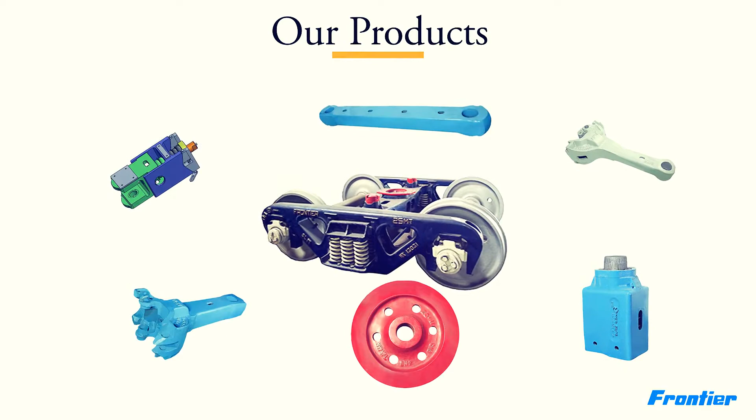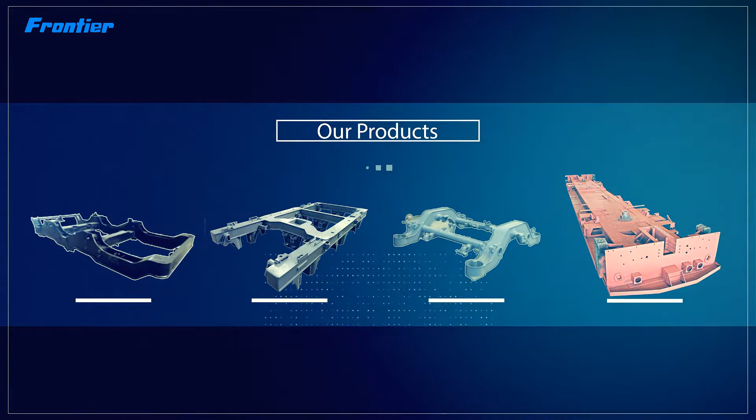Some of the major products manufactured by our company are friction clutch, balanced draft gears, E-type and H-type couplers, slackless drawbars for BLC wagons, cast steel bogies for 22.9 ton and 25 ton axle load, fabricated bogies, front parts for LHB bogies, underframes for LHB bogies, and locomotives.

Indian Railways and their associates are the major customers of Frontier Alloy Steels.

In order to globalize our prospects, we have entered into a technical collaboration with MCT USA, Trinity Group, and Miner Inc. USA, and are actively associated with IIT Kanpur and RDSO for developments.

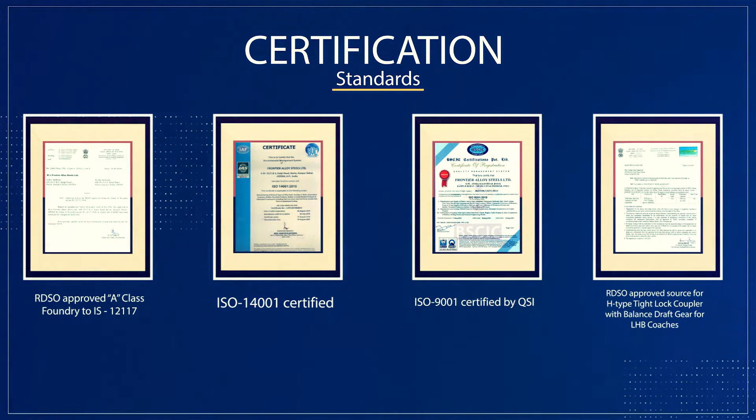Accredited with Class A foundry status from RDSO Lucknow, ISO 14001, ISO 9001, and RDSO-approved source for H-type tight lock couplers for locomotives with low preload, balanced draft gears for LHB coaches, and fabricated components, namely electric and diesel locomotive bogies. RDSO Part 1 source for H-type tight lock couplers with low preload draft gear for diesel and electric locomotives.

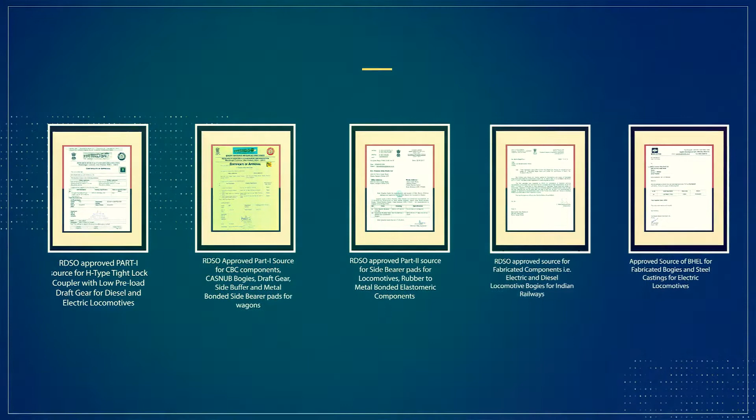CBC components for Casnub bogies, draft gear, side buffer and metal bonded side bearer pads for wagons. Part 2 approved source for side bearer pads for locomotives and rubber-to-metal bonded elastomeric components.

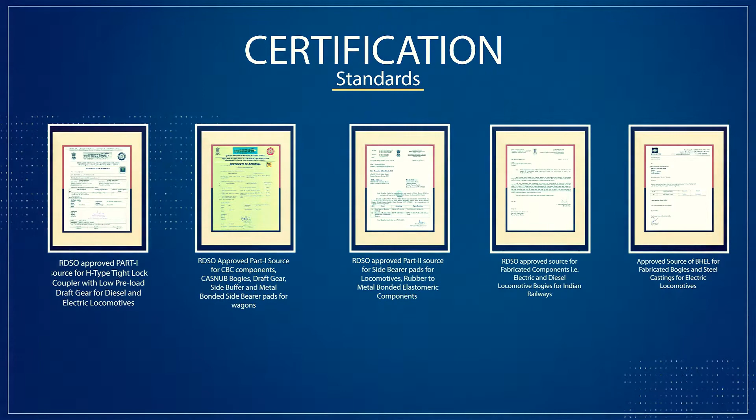Approved source for BHEL for fabricated bogies and steel castings for electric locomotives.

Manufacturing facilities.

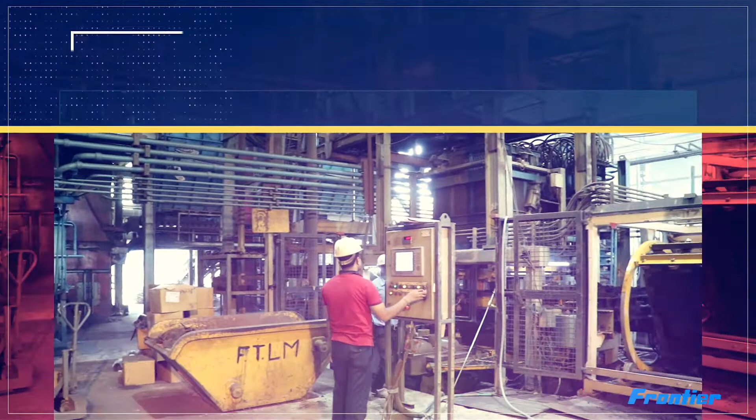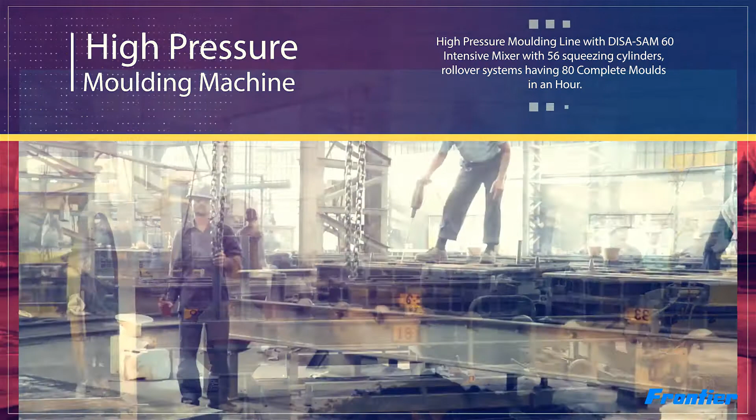Frontier Alloy Steels Limited is equipped with the latest high-pressure molding line with DISA-SAM 60 intensive mixer with 56 squeezing cylinders, rollover systems having 80 complete molds in an hour.

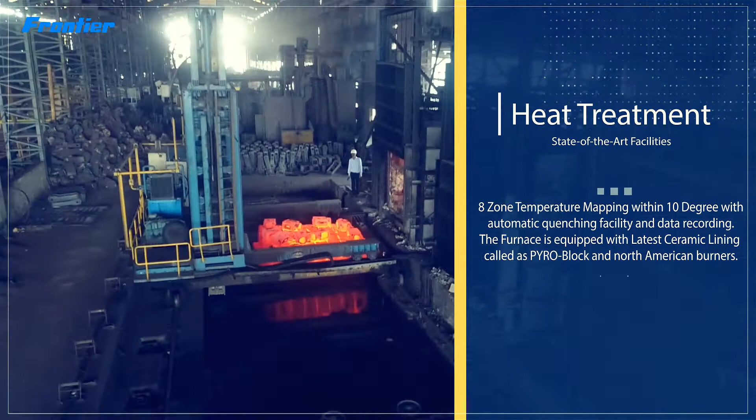State-of-the-art heat treatment facilities with 8-zone temperature mapping within 10 degrees, with automatic quenching facility and data recording. The furnace is equipped with the latest ceramic lining called Pyro Block and North American burners.

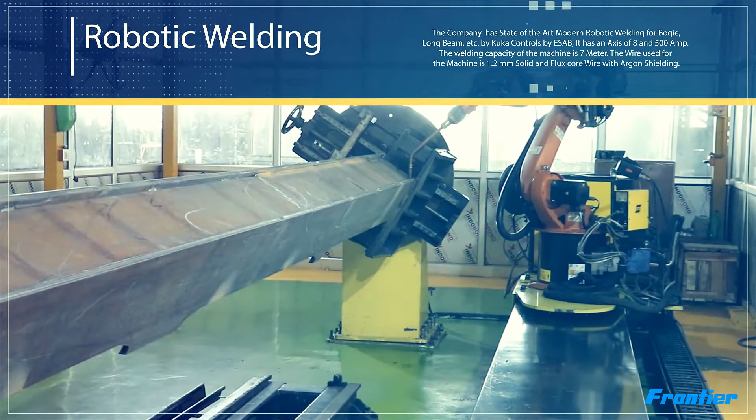The company has state-of-the-art modern robotic welding for bogies, long beams, etc., with KUKA controls by ESAB. It has an axis of 8 and 500 amp. The welding capacity of the machine is 7 meters. The wire used for the machine is 1.2mm solid and flux core wire with argon shielding.

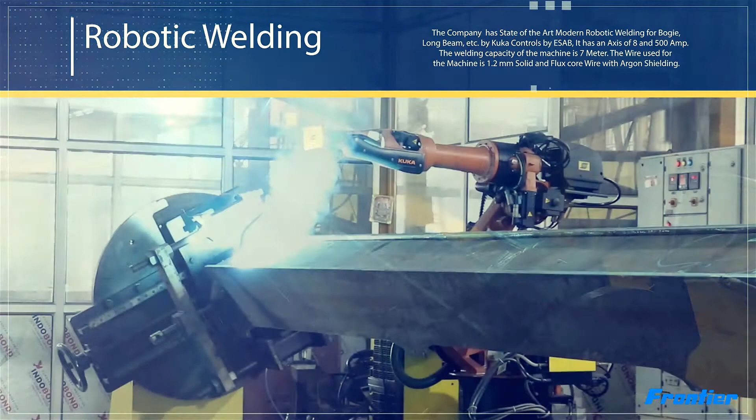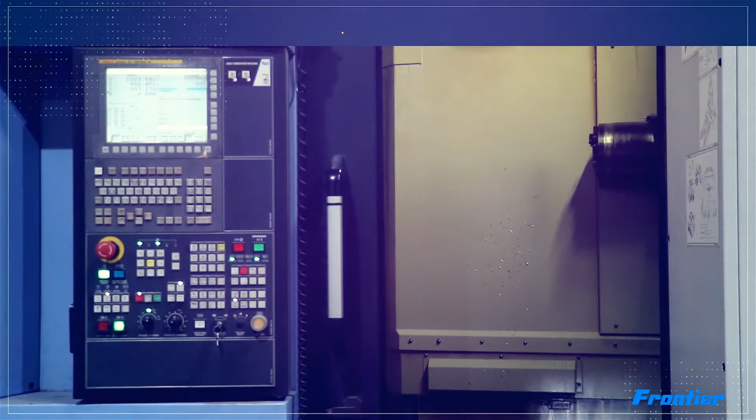Horizontal machining center having bed size 800 by 800 millimeters with BT50 spindle having torque 105 to 147 Newton meters, with 50 tool ATC, dual pallet changer, through coolant cooling.

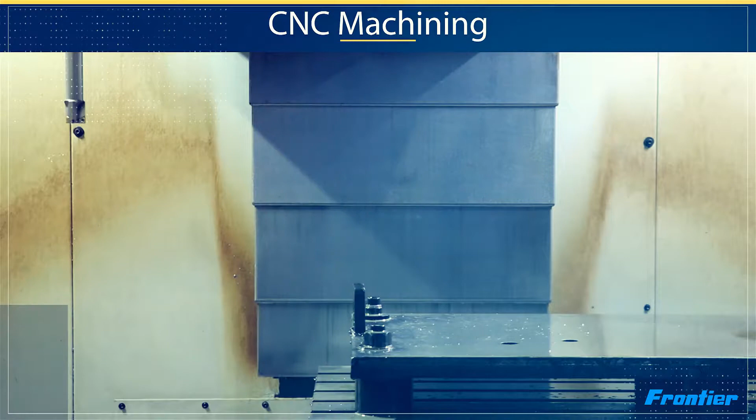Vertical machining center having bed size 1250 by 600 millimeters with BT50 spindle having torque 188 to 254 Newton meters, with 28 tool ATC, through coolant cooling.

Tap hammer facility for dynamic testing. We have in-house tap hammer testing facility with 27,000 pound drop weight and instrumentation as per AAR M901F, capable of generating dynamic events within a frequency of 1000 cycles per second.

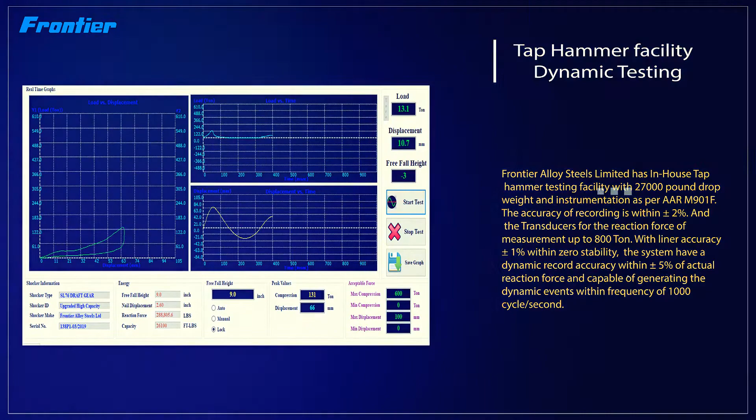In-house MAGMA casting simulation software is a comprehensive and effective optimization tool for improving metal casting quality and reducing production cost. The software is fully featured to simulate the pouring, solidification, defect analysis, sectioning, and pouring temperature of different cast materials.

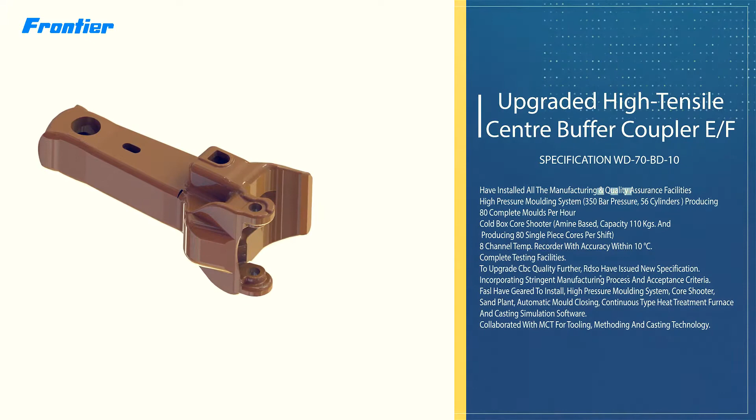H-type tight lock coupler for coaches, originally APTA make couplers, indigenously developed with our principal collaborator MCT USA, used in locomotives and LHB coaches with advanced tooth and socket joints with maximum slack of 3.5mm for comfortable ride.

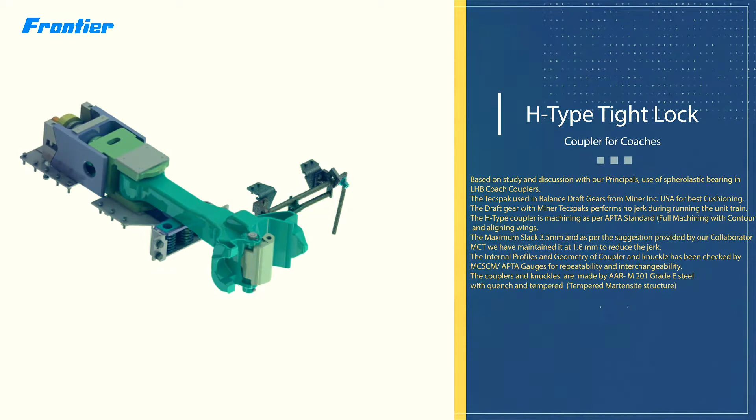Balanced draft gear assembly for H-type tight lock coupler, developed indigenously with our principal collaborator Miner Enterprises USA with thermoelastic compression springs. Draft gear for BOXNHL wagons SL76, developed in collaboration with Miner USA and as per RDSO specification with 45,000 foot-pound dynamic capacity.

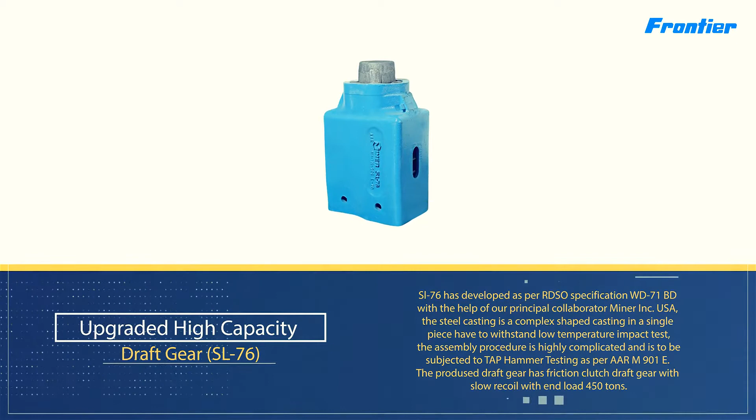Draft gear for BOXNHL wagons SL76, developed in collaboration with Miner USA and as per RDSO specification with 45,000 foot-pound dynamic capacity.

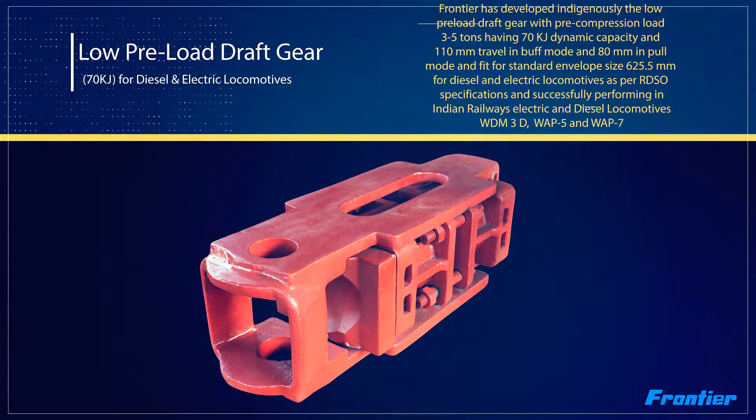Low preload draft gear, 70 kilojoules, for diesel and electric locomotives, developed indigenously with pre-compression load of 3 to 5 tons, having 70 kilojoule dynamic capacity and 110mm travel in buff mode and 80mm in pull mode, fit for standard envelope size 625.5mm for diesel and electric locomotives.

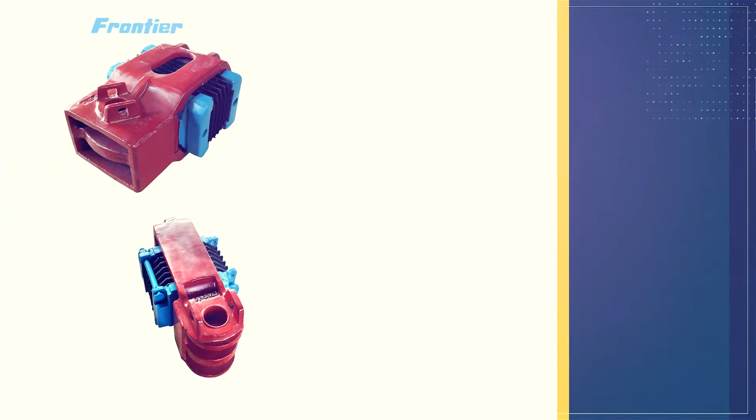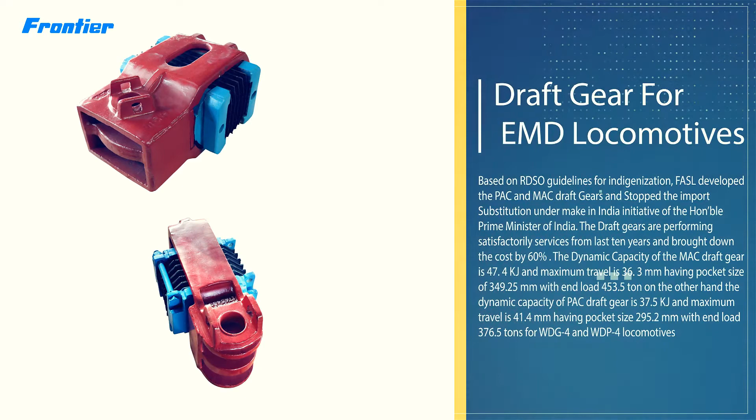Draft gear assembly for EMD locomotives, developed indigenously based on RDSO's guidelines, providing import substitution under the Make in India initiative. The draft gears have been performing satisfactory service for the last 10 years and brought down the cost by 60%.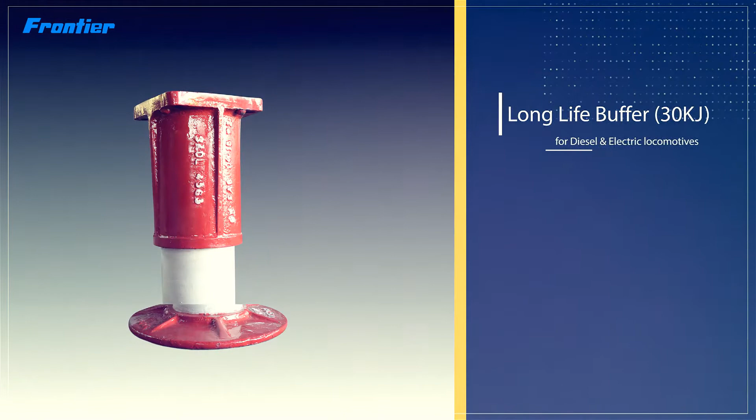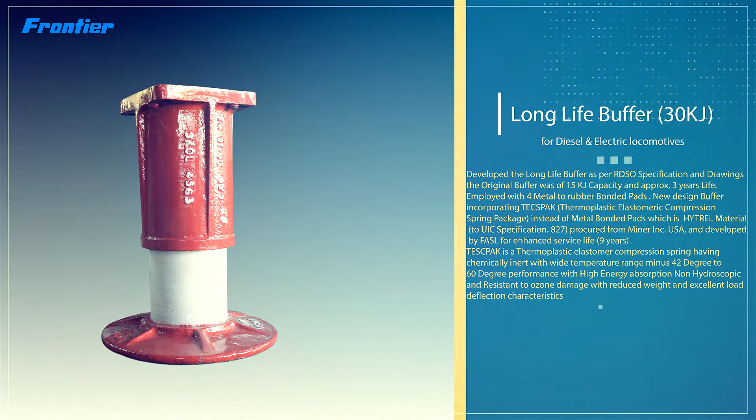Long life buffer, 30 kilojoules, for diesel and electric locomotives, developed as per RDSO specification and drawings, incorporating TECSPAK thermoplastic elastomeric compression spring package instead of metal bonded pads, which is a HYTREL material, to UIC specification 827, procured from Miner Inc. USA and developed by FASL for enhanced service life of 9 years.

Slackless drawbar for BLC wagons, developed indigenously as per RDSO specification under the guidance of our principal collaborator MCT USA in the year 2010, withstanding static loads of 900,000 pounds without rupture, providing import substitution under the Make in India initiative.

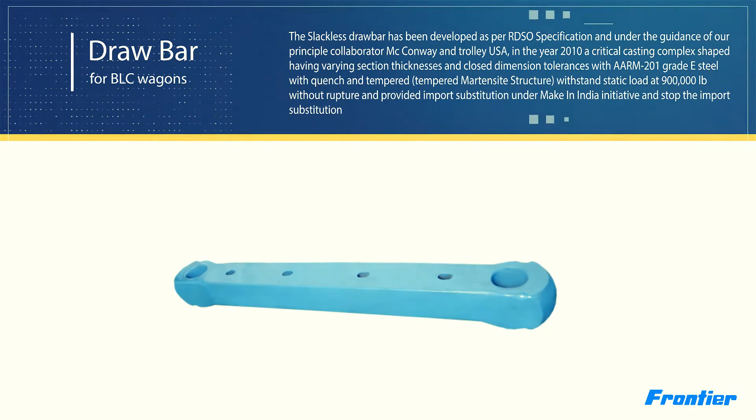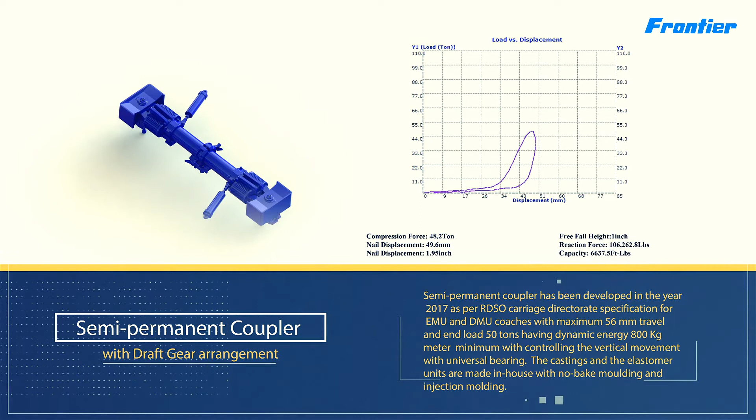Semi-permanent coupler with draft gear arrangement, developed in 2017 as per RDSO Carriage Directorate specification for EMU and DMU coaches, with maximum 56mm travel and end load of 50 tons, having dynamic energy of 800 kg/meter minimum.

Lost wax setup having capacity of 120 tons per month in Paonta unit for WD70 BD coupler components and H-type coupler components.

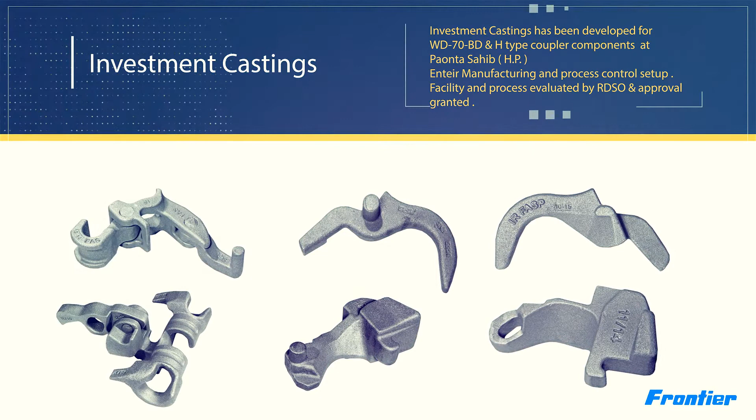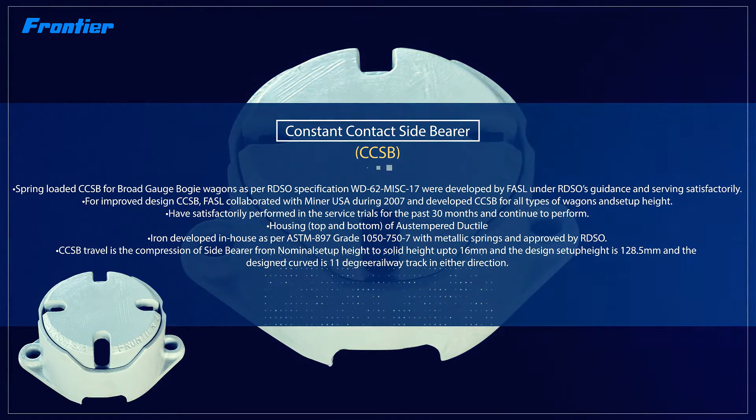ADI casting facilities at Kanpur unit having capacity of 150 to 200 tons per month, manufacturing spring-loaded CCSB as per RDSO specification WD62 with austempered ductile iron, and friction wedge with higher coefficient of friction for BLC wagons as per RDSO specification

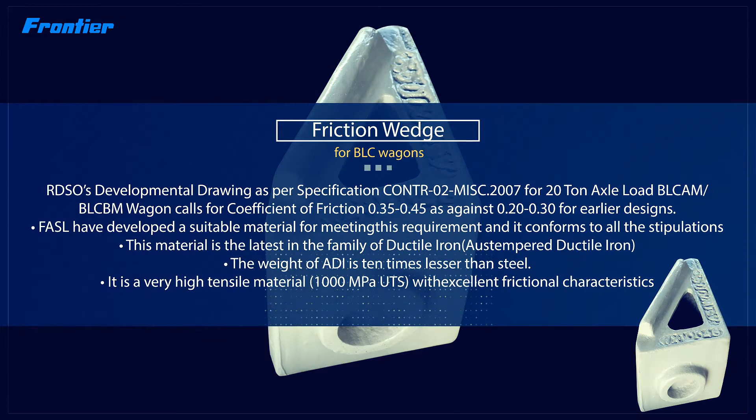CONTR02 for 20-ton axle load BLCAM or BLCBM wagons with coefficient of friction 0.35 to 0.45 mu.

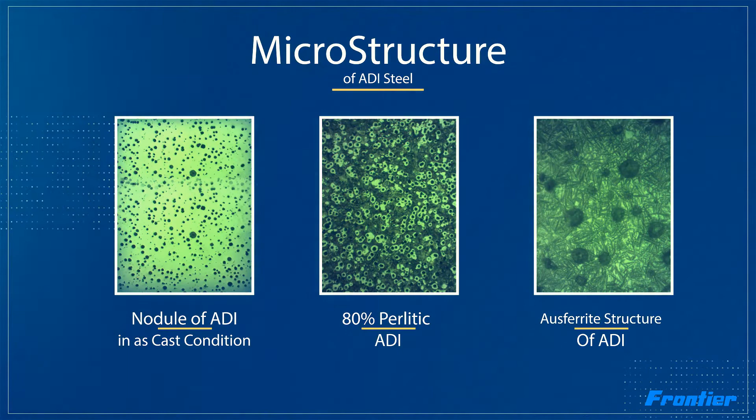Development of 20-ton axle load bogie for gondola wagons in 2014 as per RDSO specification and designed by RDSO and ARI with cast steel AAR M201 grade B+. This bogie has passed the oscillation trial at 80 km per hour, in both loaded and empty conditions.

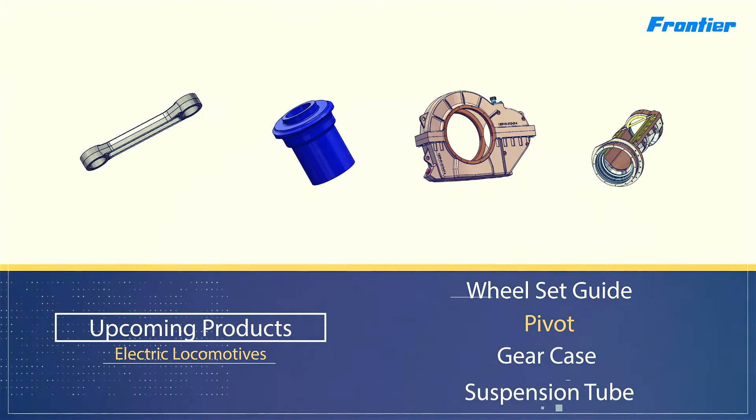Frontier is under developing stage 4 wheel set guide, pivot for WAP5 locomotives, gear case for WAG9 locomotives, suspension tube, Train 18 couplers, TM suspension holder, front part for LHB coaches, and housing for WAP5 locomotives.

Recent developments: We have developed and supplied dual-mode bogie for WDAP5 locomotives, indigenously developed draft gear as per RDSO specification. WD-72 BD cushioning elements have been developed by our rubber division HP, suitable for standard pocket size 625.5mm.

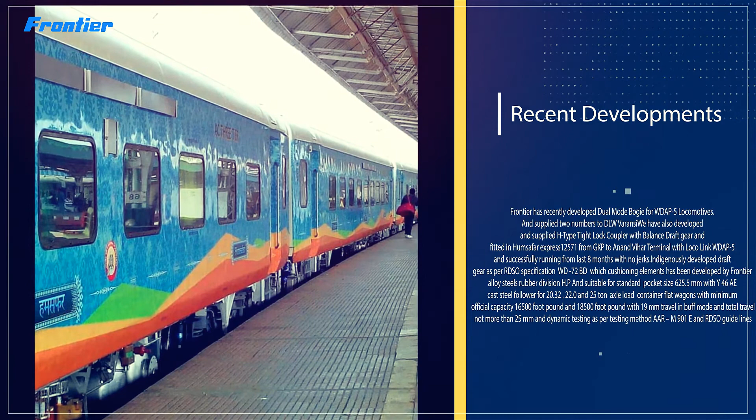With Y46 AE cast steel follower for 20.32, 22.0 and 25-ton axle load container flat wagons, with minimum official capacity of 16,500 foot-pound and 18,500 foot-pound.

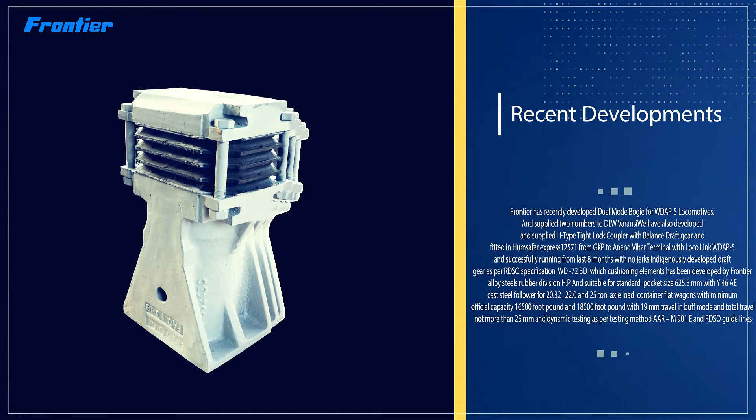Frontier Alloy Steels Limited.